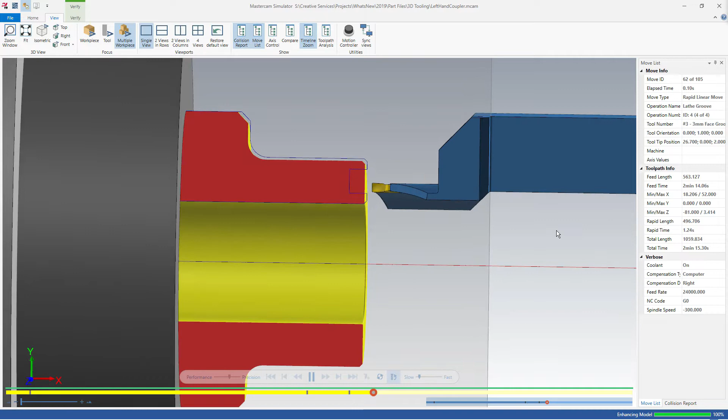The advantages that you'll find with 3D tooling over the old two-dimensional tooling is you're going to have all kinds of more accurate collision detection and just a better representation of your tooling in general. You'll be able to see the benefits in classic backplot, Verify, and full-blown Mill-Turn simulation.

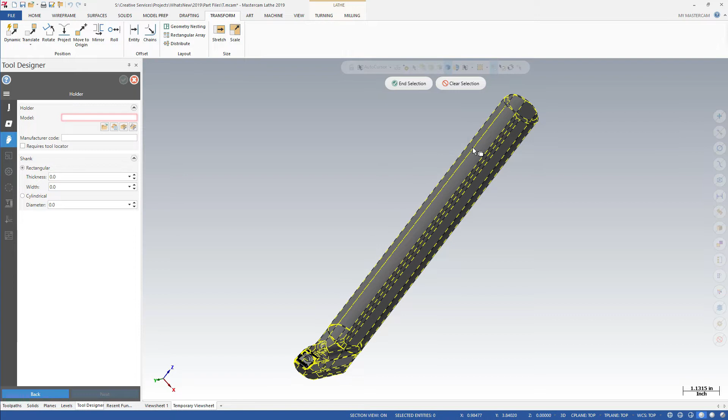One of the features that you'll see in 3D tooling is the ability to mate inserts to holders. A lot of times if you do go out to these vendors' websites and download a model for your tool, it may not have the exact tool nose radius on the insert that you're after. So you can go out, modify the model manually, or get a different insert model for your tool, and right inside the 3D tool designer, you'll be able to mate your inserts to your holder.

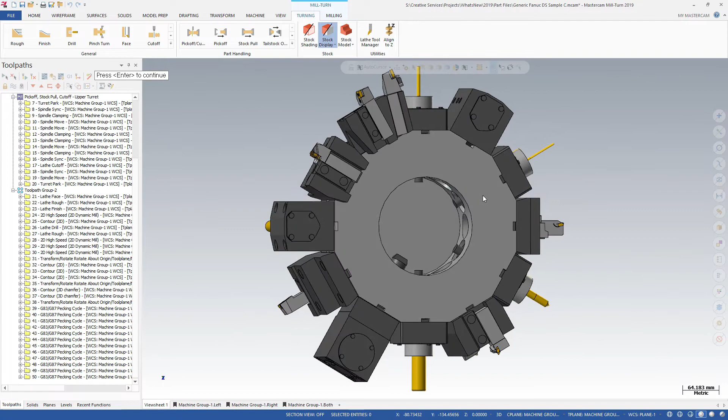For Mastercam 2019, one of the big projects that we had was to improve the auto-loading algorithms inside of the Tool Setup Manager. We now support cross-left and cross-right locator properties, and we can auto-load into half-index and multi-station tool locators.

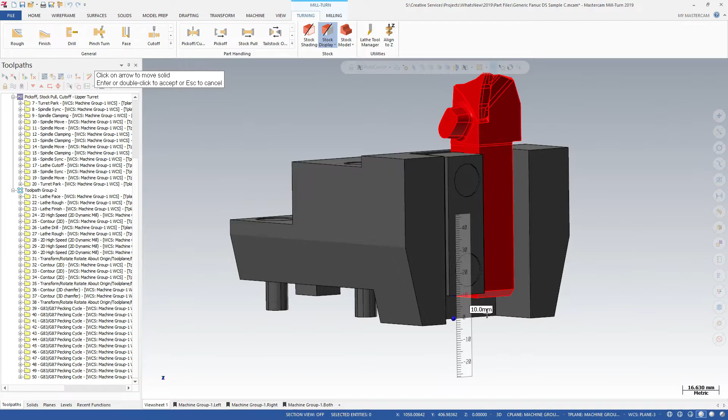Once you've gone through the auto-loading process, or you've manually loaded the tools onto the turrets however you'd like, you can go into the locator properties and adjust the projection length of the tool. Or you can right-click right on the tool and you'll get a gnomon and a graphical representation of your tool in the locator, and you can slide that tool up and down to adjust the projection length.

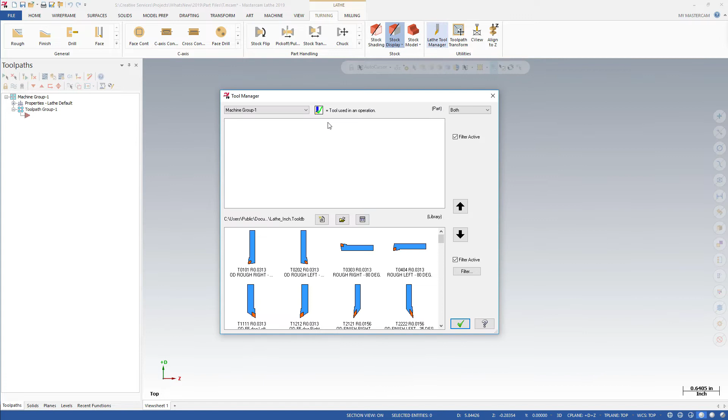Mastercam 2019 introduces 3D tool support for lathe and Mill-Turn. The new Tool Designer makes it easy to define 3D lathe tools. The designer comprises 9 pages of settings that cover every aspect of creating your 3D tool, from loading STP models, to mating an insert to its holder, defining boundaries, setting mounting positions and cutting planes, and more.

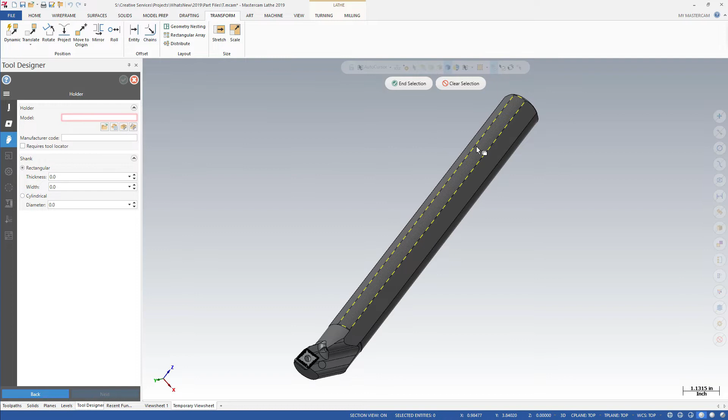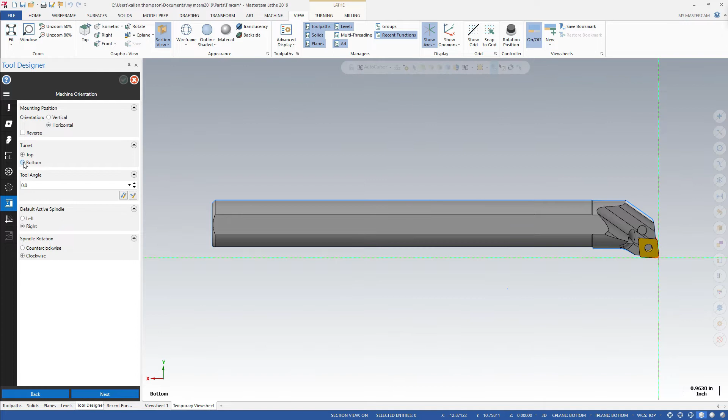Dedicated in-designer tools make it easy to assemble components. You can choose from 3 types of mating positions: coincident, parallel, and perpendicular. On the machine orientation page, as you make changes to the options, the tool image immediately updates to show the results. This makes for a smoother workflow than when creating 2D custom tools, which required you to go back and forth between changing the tool attributes and drawing the tool to check your results.

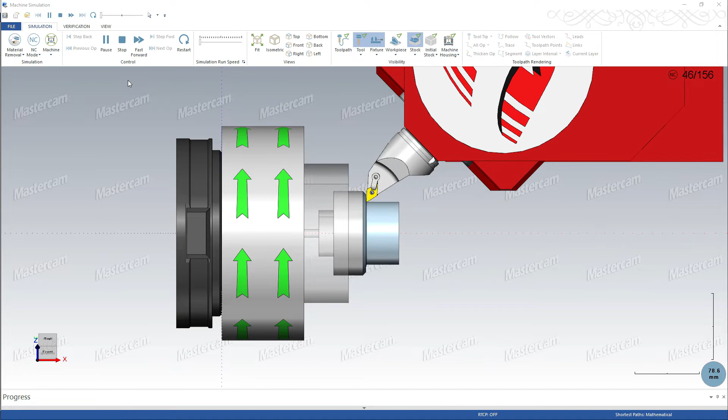After working through the tool definition process, you will have a 3D tool that you can use to simulate the cutting of your part. Post your operation and run machine simulation to see your 3D tool in action. Using a 3D tool, you can find problems with your toolpaths that may not show up when using custom 2D tools. 3D tools also make Backplot and Verify sessions more accurate.

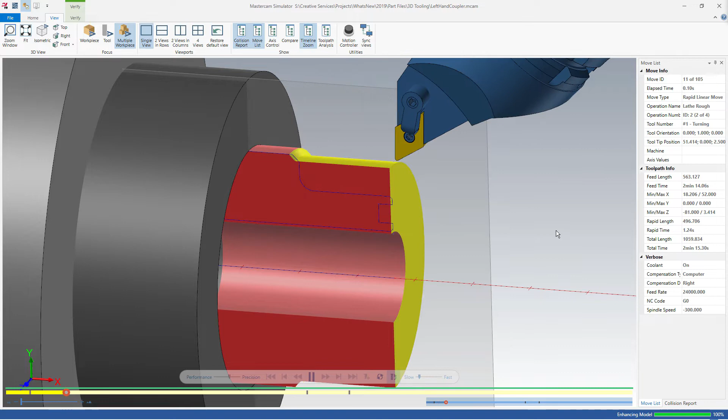Here, in Verify, you can get a close-up view of the insert's tight clearance when cutting. Now you can machine close clearances with confidence.

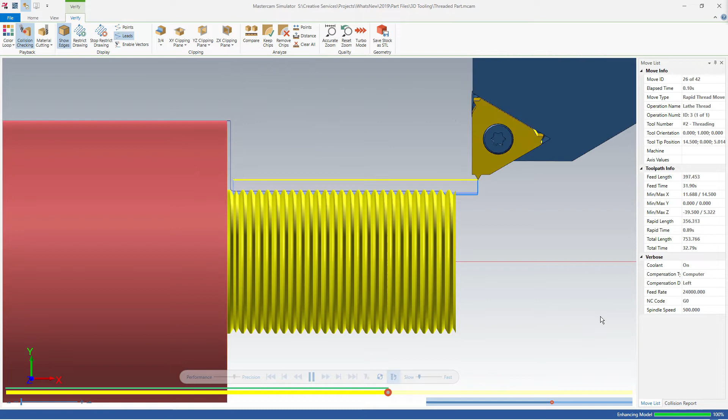With 2D custom tools, you could not define a threading tool with a compensation point based on the tip of the tool and the edge of the insert. 3D tools make this possible. Defining the compensation this way on a 3D tool ensures that the threading tool can cut a complete thread, while not crashing into the shoulder of the part.

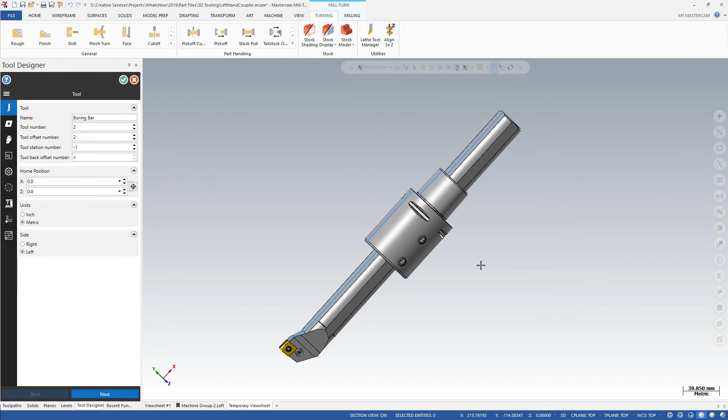The new Tool Designer helps you create 3D representations of your tools. You can then use these 3D tools to increase the accuracy of cutting simulations and eliminate possible collisions before you attempt to machine the part.

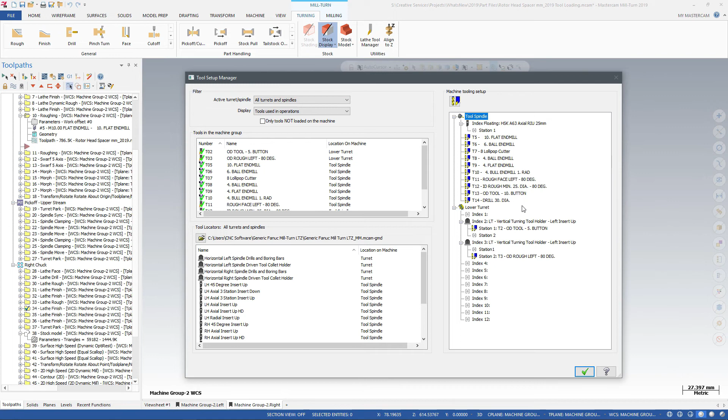Mastercam Mill-Turn 2019 includes new tool loading algorithms for multi-station and half-index tool locators, as well as support for angled tool locators on turrets. Tools are also more reliably oriented for left and right spindles. Tool locator stations for cross-turning tools can be defined so that the tool selection prioritizes the left or right spindle.